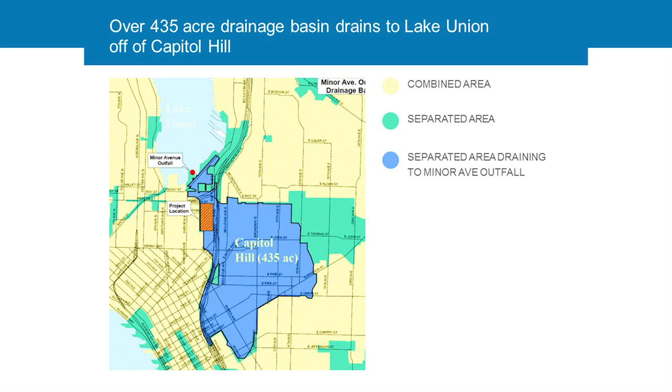There were some very simple project constraints. Where we're building this is a very dense, urban developed area in South Lake Union. There were a plethora of existing utilities, including 5 different communications companies, a very large electrical duct bank for Seattle City Light that was maybe 30 inches below the surface. There was a 100-year-plus old water main through the area that was no longer in use but was in the way. There were gas lines in the way that we had relocated, and they ended up still in the way—one of the telltale issues.

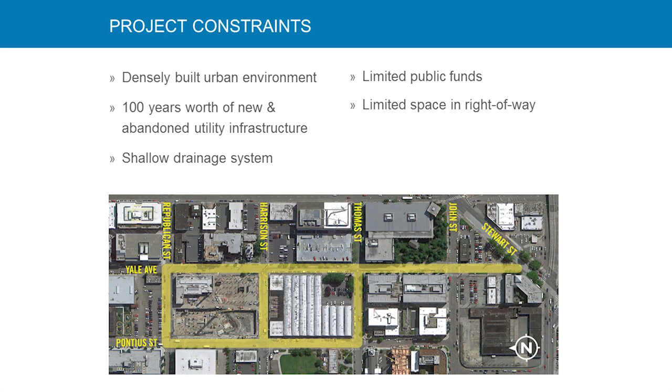The existing drainage system that was there is pretty shallow. There were limited public funds, which is never different—there's always limited public funds—and there was limited space in the right-of-way to do things.

So the general plan was to take water coming down off Capitol Hill, which came down Denny Street, and divert it out of the main line into a parallel system that would allow it to go through and get water quality treatment for the lower flows. During higher flows, it would just overflow back into the existing conveyance system. That was really important—even the swales, after the water goes through them, it goes back into that same pipe that discharges out into Lake Union. That way we didn't have to create any additional outfalls and go through the entire process of getting permission for additional outfalls. In the end, there are 4 swales.

The first 2 swales got built on the north end, and I'll talk about that more later. The treatment capacity is roughly 7.2 cubic feet per second with all 4 swales online, which they will be as of next spring. The second set of swales got finished being built in January of this year. It was really important because this is next to a private development—it was an amenity, not just something tacked on.

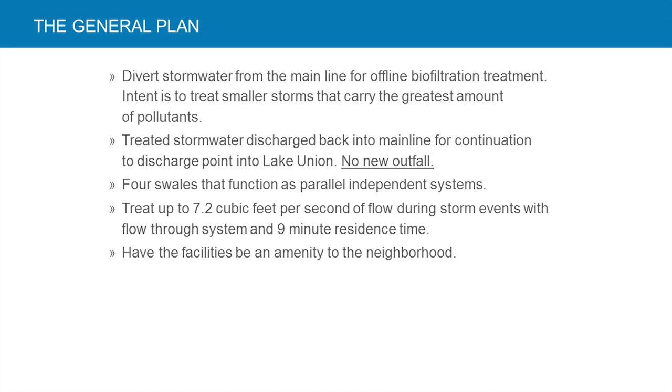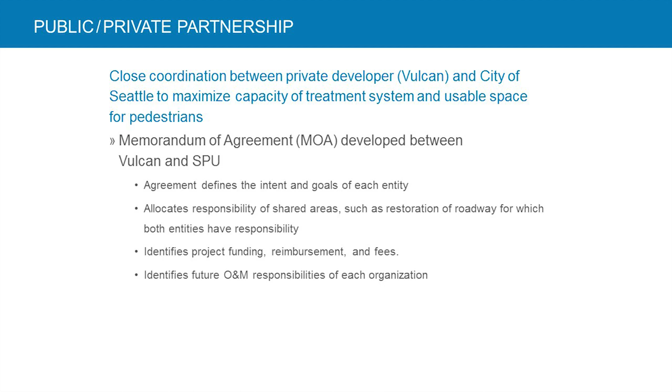The public-private partnership was really important. The city spent a lot of time putting together a memorandum of agreement with Vulcan. It outlined a whole series of things, including who was going to maintain it and how much Vulcan was going to contribute to the city. One portion of the swales actually has a dedication of property to the city to allow for the sidewalk to go adjacent to the swale and still have the swale put in. So a number of different items through this memorandum of agreement.

This is the basic layout of the swale, and I'll get into more detail in the next few slides. Here's the diversion structure, on Stewart Street. The city designed this first part with some input from us. The biggest input we had, which they put in, was adding an overflow structure. The idea was to make sure we weren't getting a lot more water than intended into the swales, so it didn't cause flush-through. So we put overflows in the flow splitting structures, and we put an overflow here.

So the first piece is the diversion structure, then it goes through the overflow system and then to a Vortechnics swirl separator. The swirl separator takes out floatables and heavy sediments, and it worked really well. I have a picture a little later on that will show you, just when it was first put online, how much of the floatables were coming out of the system.

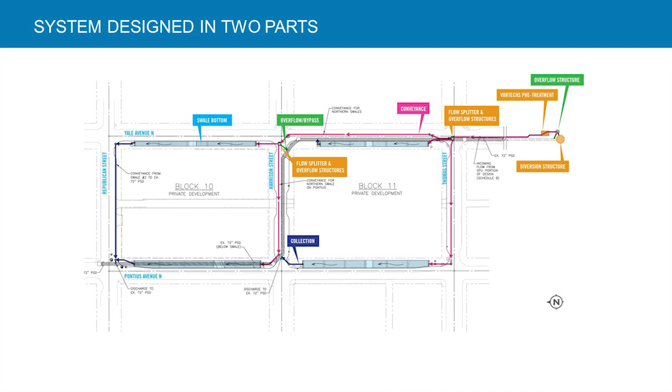A little closer in, here are the various different things. Because construction of the swales was directly tied to construction of the private development, we ended up building the northern portion of the swales first. This flow splitter device and the diversion structure are on the very south end of the system. The piece in the middle just got done in January. The piece on the north end was done, I believe, six years ago now—it's been a long time. The city did everything up to right there, and then KPFF and KPG took over the design and took it the rest of the way.

One of the things we had to do, because we were building the northern piece first, is put all the conveyance lines in for the entire system as part of the first phase of design. We also had to relocate some other utilities out of the way for future development.

Each one of the systems is controlled by flow splitter boxes, and depending on the number of places we're sending water, we have more or less controls. They're all controlled using orifices, and each flow splitting device has an overflow that allows it to go back into the main line. That's also important when they go to do maintenance on the swales—they want to shut the water off, and there are multiple ways of doing that. One is a sluice gate in the original diversion structure. The other is by pulling the elbows off that have the orifices in them and plugging the pipes going into the swales at the flow splitting devices.

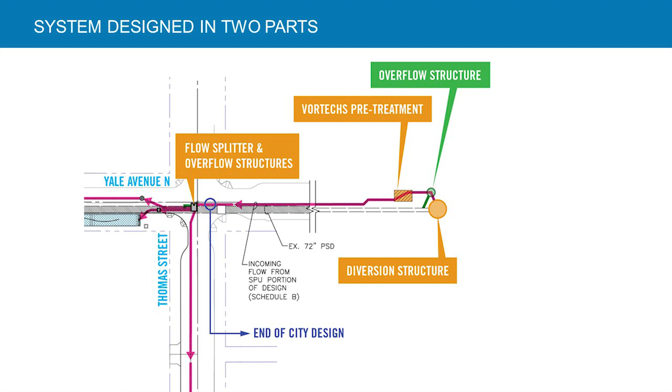So overall, the swales—this flow splitter at the south end is down on Thomas Street, ran pipe up here to another flow splitter that then ran the water over and fed the swale. This is called the swale on Yale by us because Yale Avenue is one of the two streets, and the swale on Pontius just didn't really sound all that catchy. Block 10 was built first, and those swales went online about five years ago or so.

The existing 72-inch line that the water is coming out of runs up here, turns the corner, and then goes that way. It actually runs underneath the swale as it goes from here to there, and we're putting the water back in.

One thing we did not do is put all the street water into this swale. We didn't want to contaminate the water we were putting into the swale with runoff from the street directly next to it—we wanted to make sure we were dealing with just this diversion structure. This was kind of an experimental project for the city, and some of the things we did on the first phase were changed on the second phase because we learned some things. I'll get into more of that later as well.

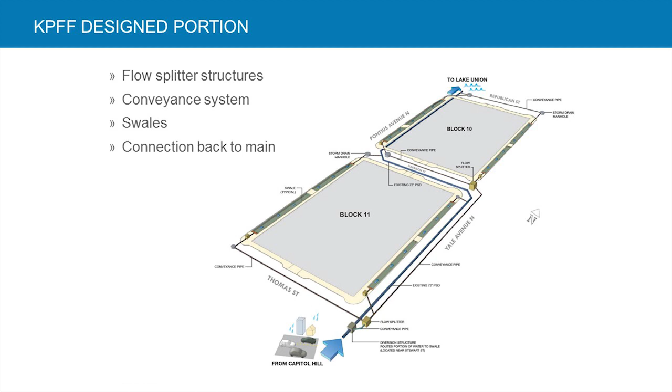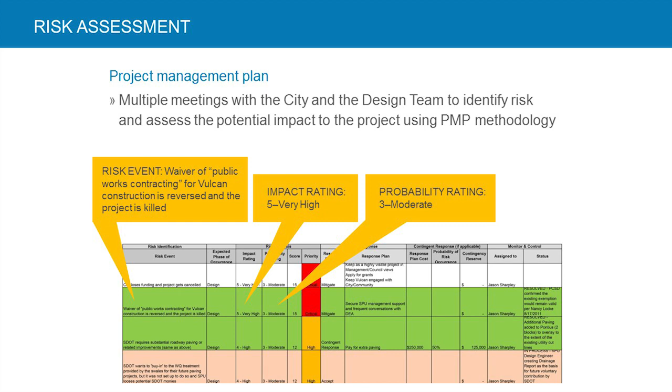One thing we went through with the city, which was really important to them, was a kind of risk assessment of what would happen if certain events occurred and what effect it would have on the project. We ranked those in terms of impact—high, low, or medium—and probability—high, low, or medium—and brainstormed a bunch of different risk possibilities. One of the bigger ones was if the developer decided not to build their building, the whole project would go away, so it was really important that things continue to move forward. That actually did delay things a little bit, because there was a lull in the desire to build the building for a while, which delayed the ultimate installation of everything.

Utility investigation, as I said earlier, there's a lot of utilities in the area, so doing an investigation of where they were and how deep they were was really important. We had a pretty aggressive potholing program that we went through. Again, we got the top and bottoms of the duct banks for the electrical. We found utilities that we didn't know were there because they hadn't been on any city maps, and they weren't being actively used.

We did know that there was a few lines that were going to need to be relocated. We found some fiber optic lines that we didn't know were there because they didn't put them where they were supposed to. We started potholing for them, and we ended up with this line going out towards the street of potholing until we actually found out where they put them, because they just randomly put them in, which actually happens a lot in Seattle.

I found on a lot of the development I've done for various groups, it says it's supposed to be 4 feet behind the curb, and you find it right up against the building, which makes it difficult to build because you can't get things in there. Anyway, this program really helped in terms of figuring out elevations of the piping, and all of this is backed up - the water is backing up in the system to get into the swales.

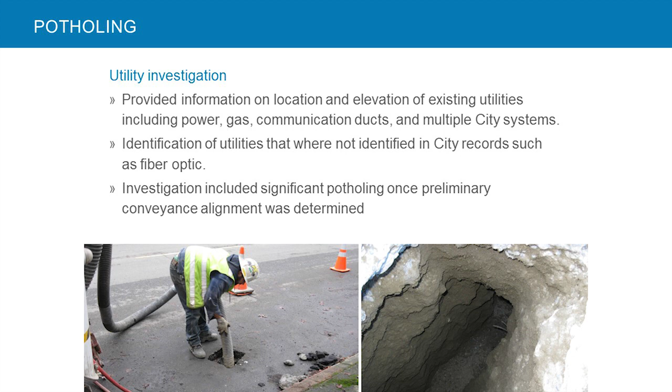The reason for the liner is, first off, the soils are not going to infiltrate water, so that wasn't a problem. But we were concerned about water getting from the swale into the subdrain system of the building, which is the foundation drainage system for the building. So there's a bentonite liner in the swale on the first set.

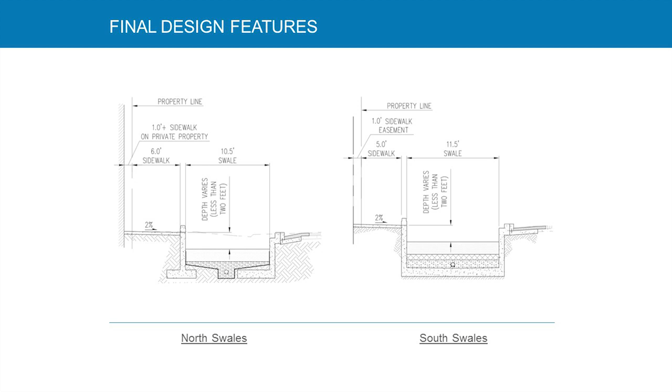And on the second set, we figured out this was really tough to build, so we decided we would just go ahead and let the footing go all the way across. We used Hi-Crete in the concrete and got rid of the liner. At one point we were trying to put in a polyurethane liner, and the cost of that was prohibitive, so the city decided to take it out and just use the Hi-Crete instead.

As I said before, we had relocations. We had to relocate a 12-inch water main that ran down through the middle of where the swale was supposed to go, and since the swale depth is about 6 feet from the top of the wall to the bottom of where everything is getting collected together, the water line was going to be in the way, so the 12-inch water line got relocated as part of the first phase.

This picture here is a dead man thrust blocking system that was put in - there's a horizontal and vertical bend in that particular location to get back to the water line where it was going to reconnect to the main system. That's about a 10 cubic yard pile of concrete under the road.

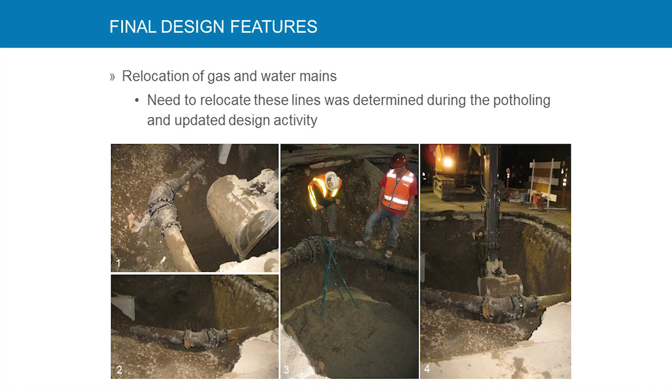And I had the pleasure of going out and inspecting that at 4 o'clock in the morning because this is a really heavily used residential area, and they couldn't shut the water off except between certain hours in the middle of the night or middle of the morning, depending on how you want to think of it.

So the North Swale is roughly 300 feet, 10.5 feet wide on the Yale side, 16.5 feet on the Pontius side. The reason the Pontius side got to be wider is they took the parking out in order to build the swales, the street parking. On Yale it was parallel parking, on Pontius it was back-in angled parking, so we had more room to work with.

The intent of all the swales is to have a little over 9-minute residence time as they flow through. The primary design technique was to design them as flow-through swales, like grass-lined swales, with a lot of heavy vegetation. The south swales, the Yale side, is slightly shorter.

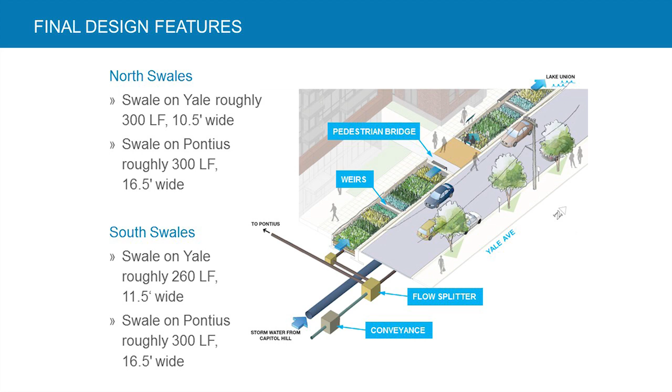It's 260 feet, and that's because of existing utility junction boxes - we actually moved several of them for Verizon, Comcast, CenturyLink, Frontier, and one other I can't remember. I told you there were a lot of communication companies with lines in the way. They were underground up to a point, then came up a pole. We ended up moving the pole and most of their junction boxes back, but we still didn't have enough room to make the thing any longer than what we had. On the Pontius side, it's about 300 feet long.

So the diversion structure - first, the pipe coming down off of Capitol Hill is about 48 inches. What we did is put a saddle manhole over the top of it, took it out, and temporarily pumped the water around where they built a wall in the middle as a weir with a sluice gate in the bottom, then connected a pipe so the water can build up to the top of the wall. It still goes out through the pipe to the treatment system. Once it gets to the top of the wall, it spills over and goes back down the path it's always gone into.

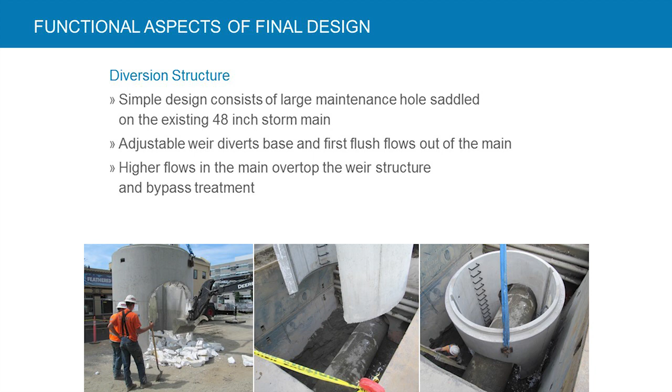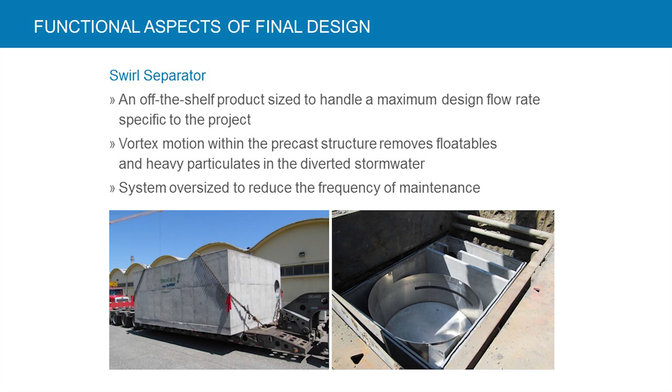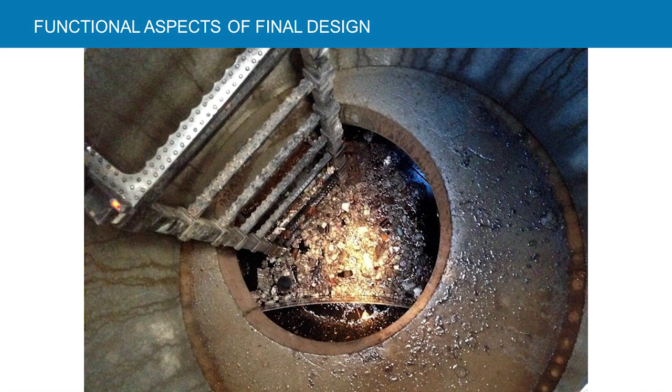Swirl separator, as I mentioned before - I'll show you a picture of what we got out of that - it's just a standard off-the-shelf Vortechnics swirl separator, sized larger than it absolutely had to be so it didn't have to be maintained as often. Here's the picture of the floatables. This is looking down inside the swirl separator about a month after it went online. It's definitely doing its job - kind of nasty looking, but there it goes.

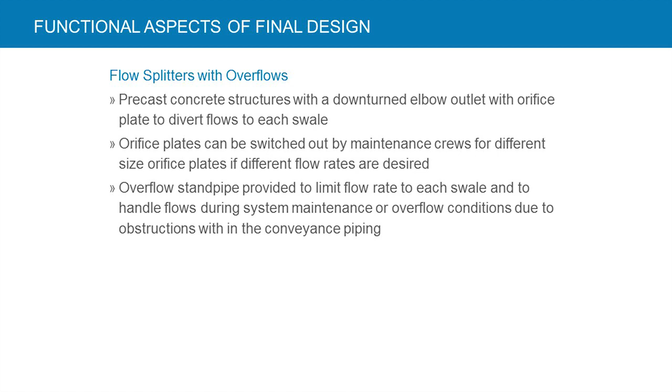As mentioned before, the flow splitters are all precast units, with orifice plates used to divert the water, and overflow standpipes that allowed for both maintenance and for any high flows if we, for some reason, got higher flows through the system than we intended. This is just a picture of what those look like.

The pipe network we put in had to be really shallow because it had to get over the top and under the bottom of all the existing things that were already there. It ended up being a ductile iron conveyance system, and it has little brass markers to locate it so people know it's there every 50 feet down the road.

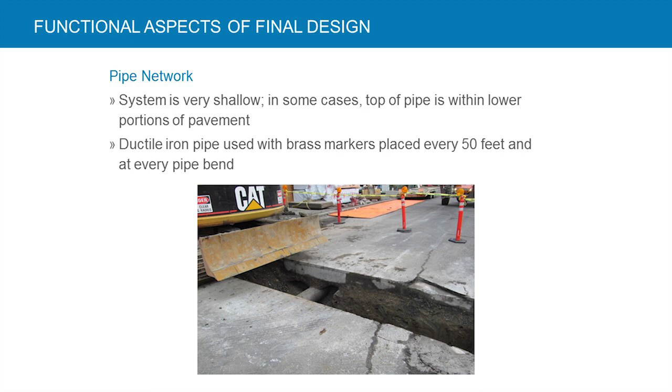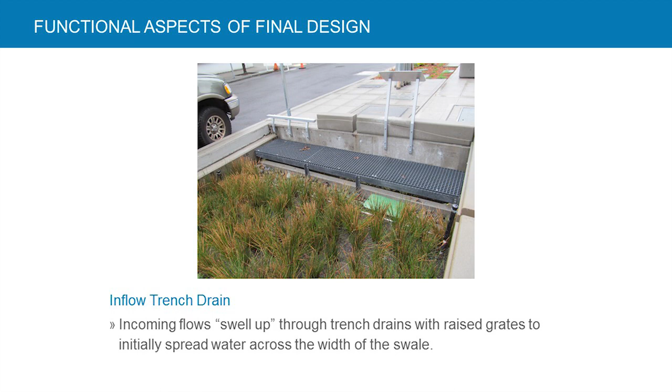The input to the swales is basically a trench drain. One of the modifications we made on the second half is we raised the trench drain up off of the box using these support things here. That was an intent to keep things from clogging up as much, because the first set of swales was getting plugged up with organic and sediment material pretty early in the process. But this allows the water to come up, spread out, and be a nice spread out flow through the swales as it goes through.

We also have wall weirs throughout the swale, both to allow for the drop to take place and maintain the residence time, but also to spread the water back out so you don't get short-circuiting through the system.

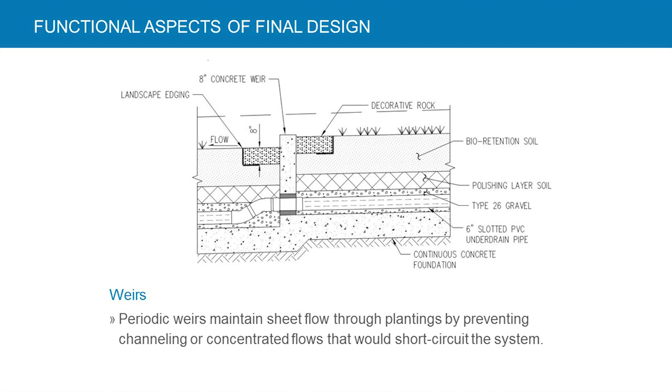The plant mix was another interesting thing - on the first one we did, we planted all the plants we were going to put into the swale in the bioretention soil mix to make sure whatever soil came off those plants didn't plug up the soils. One thing we learned was that was a real pain to do, and it caused us not to have extra plant material when we needed it. So we went to bare root on the southern swales for the second half of the project. There's roughly 20,000 plants, a huge number, planted basically 10 inches on center, with a wide variety to make the thing look really nice - there's pictures later I'll show.

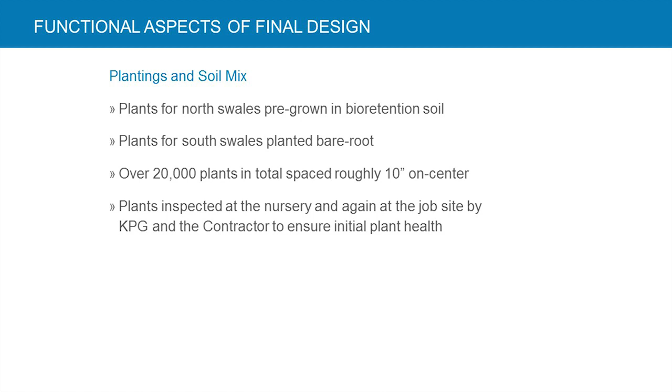We pretty much used the bioretention soil mix that is currently 60-40. We used something very similar to that, although it changed between the first set of swales that were constructed and the second. Another thing that changed is we put in a polishing layer to remove phosphates, because phosphorus increased due to the bioretention soils. So we put something in the second phase of the swales to take care of that.

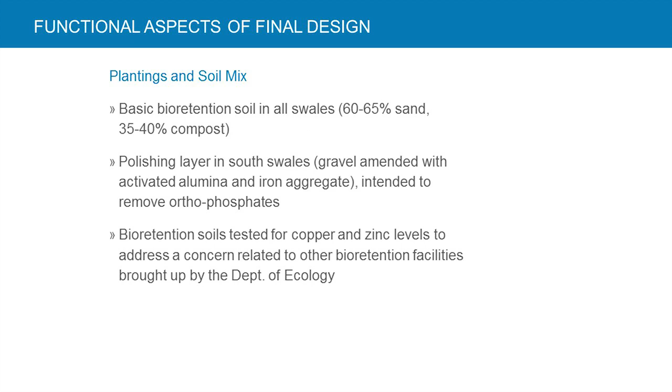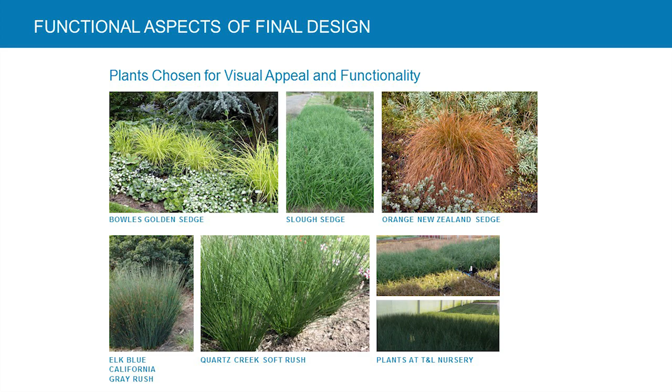So these are some of the plants that were used. The idea was to get different colors to make things a little more interesting, but they're all rushes and sedges. So this is what it looked like when it got built.

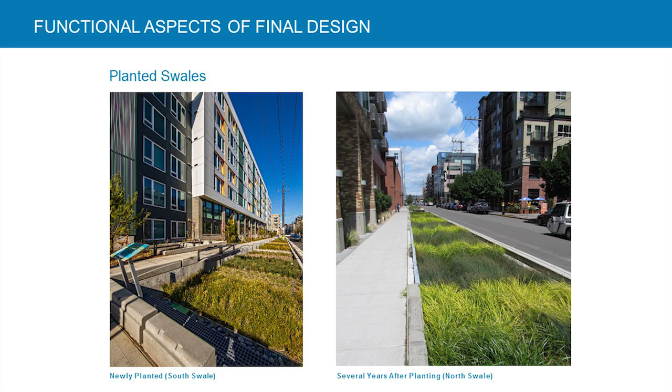Lots of different colors, things really grew beyond our dreams. One thing we noticed is that some plants overtook other plants, so in the second set of swales we planted a different mix because some of the plants didn't survive in the first one. They're even in little microclimates - they survived on one side of the building and not the other because it's more in the shade.

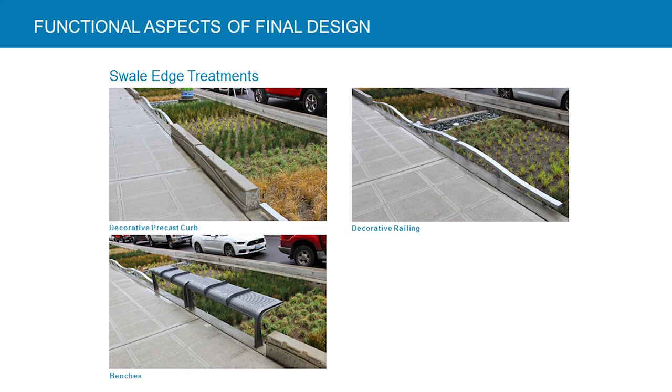These are some of the streetscape elements along the edge that made it more attractive to the developer next door, in terms of seating, curbing, and this kind of rolling, flowing metal edging piece.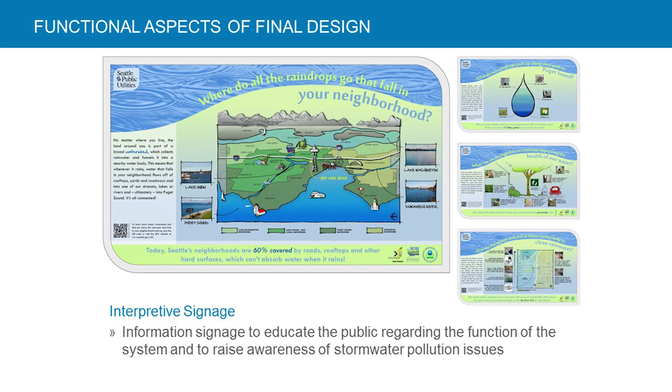We also put in interpretive signage for people coming by so they can see what this is actually supposed to be doing. We put in pedestrian bridges at mid-block crossings because that's something the developer wanted and the city was okay with. Ultimately the City Department of Transportation maintains those, and the maintenance of the swale itself is done by Seattle Public Utilities.

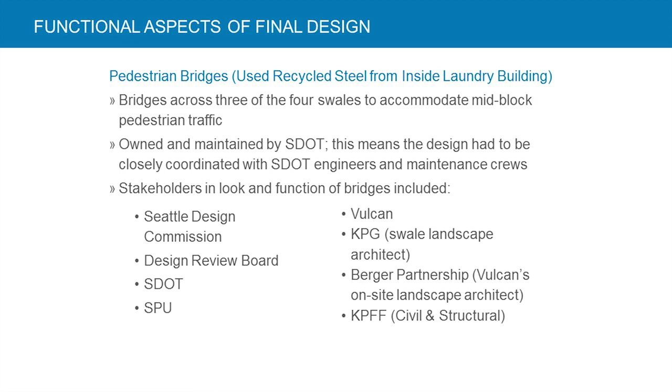This is just a picture of the first bridge going in. One of the nice things is it's next to what was an old laundry building, and we took steel members out of the old laundry building and used them to build this bridge. So that was a nice sustainable piece.

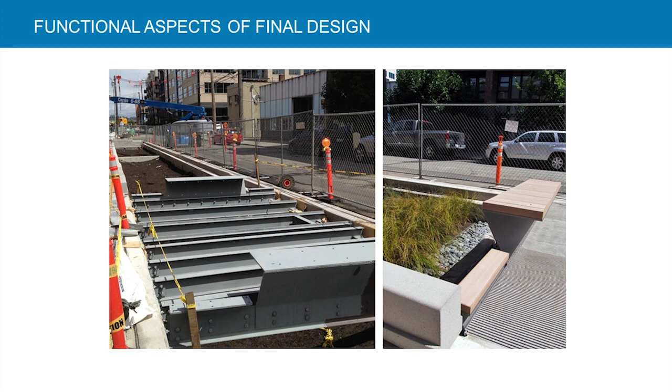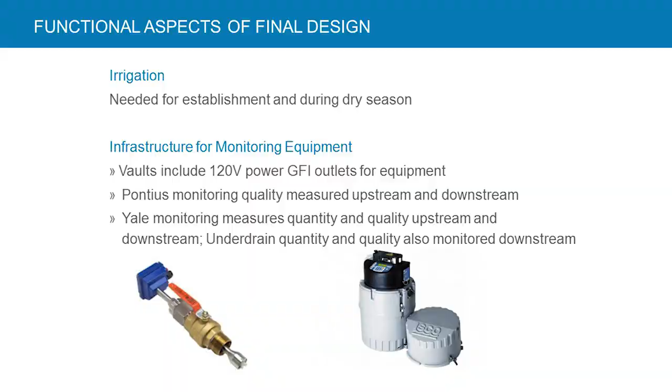The city put in, as part of this, because it's kind of a demonstration type project, monitoring facilities, and we have that also for the second set of swales going in. The first set they were monitoring on the Yale side, and they'll be monitoring both sides on the new ones.

So again, kind of phased different sets of construction. Some street improvements were done by the city, some by the developer, and this is just a quick run through of the various different phases of what we're getting done.

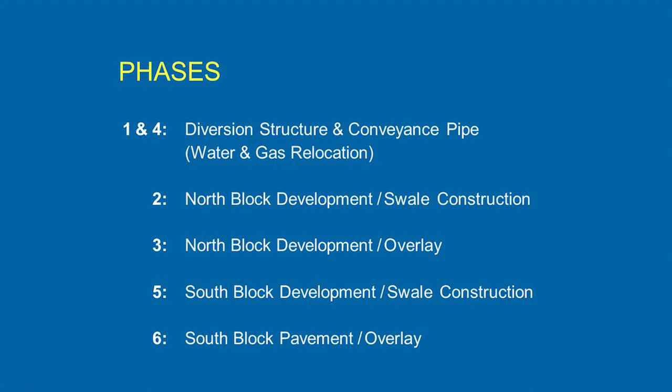Picture of the diversion structure, the swirl separator, the beginnings of construction of the swale, one of the flow splitting devices. The picture on the right is the first round, where we actually built the footings out on either side instead of all the way across.

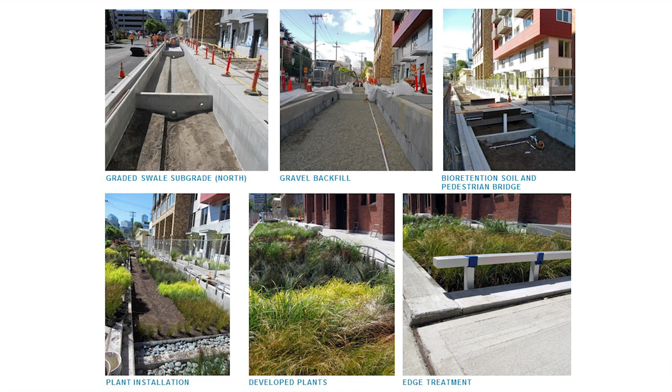Some of the planting going on, and the edging material. One nice thing we got is the Design Commission at the City of Seattle actually created an award just for this project because they were so psyched about how it turned out from a design standpoint. So we got this 'on the boards' award from them, which was nice. It's nice to get awards as an engineer - you don't get them very often.

Removal - this is the most important part of this to me. The removal rates on this were fantastic, and actually the city's private consultant that monitors their systems told us that this was the best stormwater quality facility the City of Seattle had, hands down.

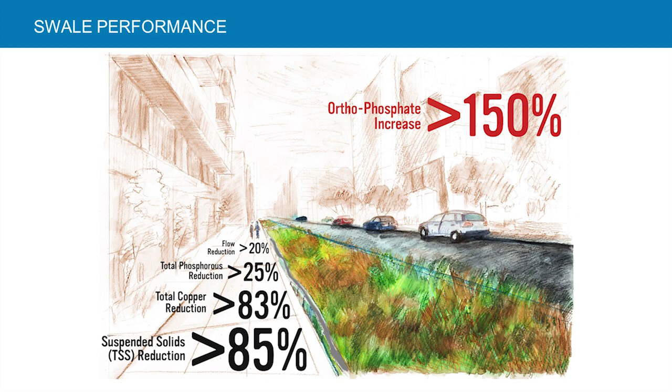The end system actually has bioretention soils that allow infiltration, which is one of the reasons we get such good suspended solids removal. There's an underdrain pipe in it, so we have both surface flow and underdrain flow in the system. Orthophosphates actually went up, which is why we added that material in the second set to pull that out of the system.

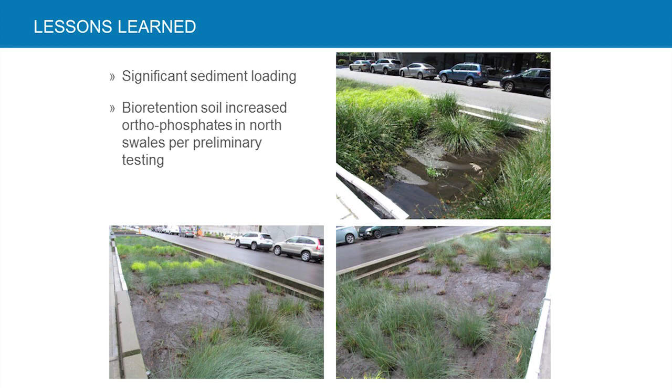One of the issues in terms of lessons learned is there's significant sediment loading, way more than I think we had anticipated. Bioretention soils increased, as I said before, the orthophosphates. Putting the liner in was a pain, and trying to build the whole thing with the footing separated was a pain, so we didn't do that on the second half.

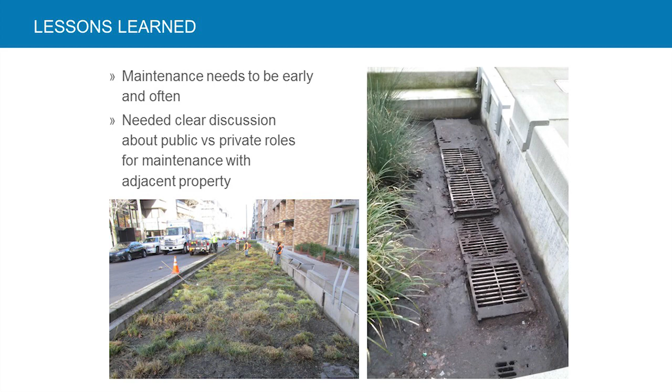Originally the grate sat down on top of the trench drain at the beginning. You can see this is a picture of it kind of sedimented up already - that happened pretty fast, so we lifted them up on the second round.

They've recently finally got around to trying to do some maintenance, or more active maintenance, on this. It went relatively untouched for a while, and they're trying a variety of different things. None of them have worked really ideally yet, but we're still working with them to come up with different ways that we might be able to make it simpler to maintain.

One thing I would advocate is this is treating about 435 acres. If you thought about trying to treat a bunch of 40 acre sites once a year, you could come in here and maintain this thing 10 times a year for the same effort. I think it needs to be maintained maybe 4 or 5 times a year, at least during the really rainy season when there's a lot of leaves on the ground - it needs to be maintained more often.

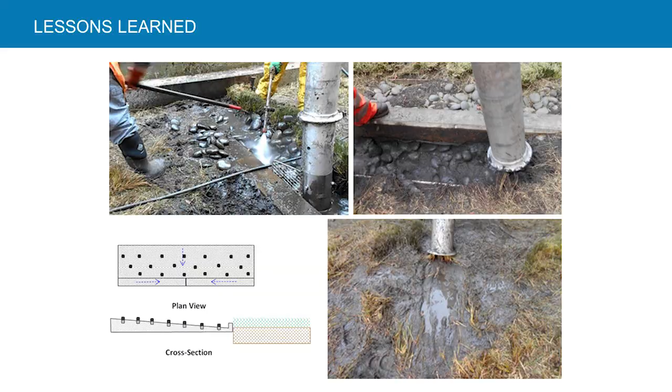And this is a picture of what it looks like on the Yale side today. I think that's it, so with that, hopefully I didn't run too much over.